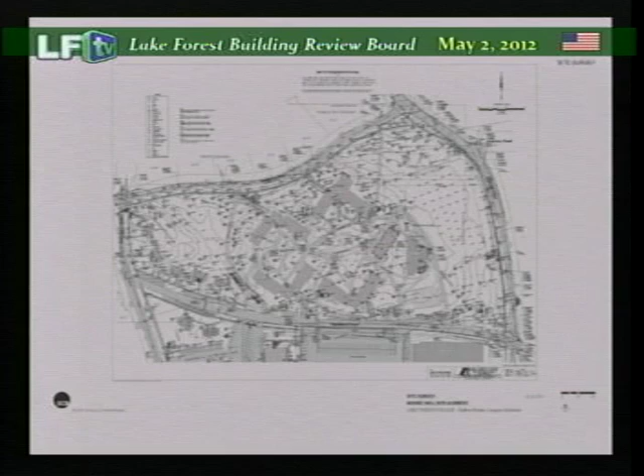The slides I have to present, I'll go through quickly for time, but I wanted to show them all to you. This is still the existing site plan showing the existing Moore Hall. You can see once again Sheridan, and the Rosemary Sports Center for the college on the south side. The majority of the college is moving to the north through Mid and North Campus. This diagram shows two footprints. The dashed line is the footprint we showed prior, which involved an angled building.

If we look at some of the significant changes made since the last presentation, siting and the building footprint is truly one of the major changes. You'll see here that the prior plan angled and followed directly to the north. Yet in the revisions, we've looked at the geometry of the existing quads. We know that the existing Moore Hall came first, prior to the quads, and established the geometry that was represented by the quadrangle development.

And by adhering to that geometry for the entire building, it does a number of wonderful things for the site. One is, you can see it's broken into really two buildings, two legs of a building that are joined in the middle. The lower leg is approximately exactly where Moore Hall is, and you'll see in the massing it's approximately the height of existing Moore.

The leg to the north staggers and follows the same geometry, but in essence those two buildings are quite similar in scale and size. Yet, as I'll show you in massing, we actually dropped the northern leg down to work with the existing topography.

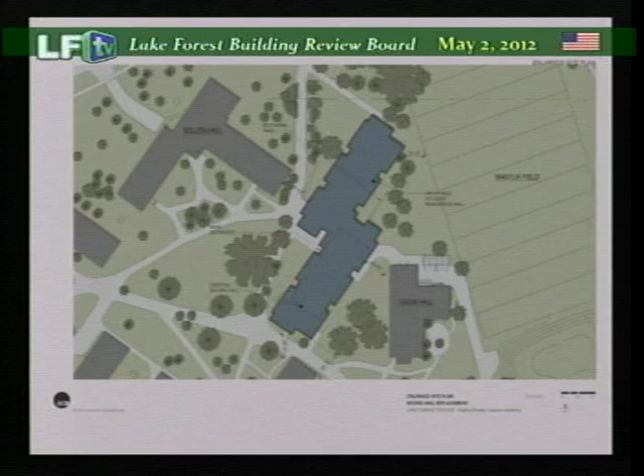If we look closer at the plan, we'll notice that all the setbacks work quite well. We have adequate distance and separation around the perimeter of the building, and although the college has agreed to relocate the water main to the north, we're actually a little further south than what we showed you before. So the setbacks are all well preserved, as is the recreation field to the east.

That's one aspect of the siting. It's allowing the building to conform to the geometry and orientation of the existing quads to make this all work as one unit. We also looked at it very quickly in 3-dimension, and we have further renderings later on.

But this was our initial study. You can see the new building is here, Nowlin is here, Hickson, and then the other quad buildings. It all starts to work as a comprehensive unit. You'll also start to see that this is where we made a step in the building.

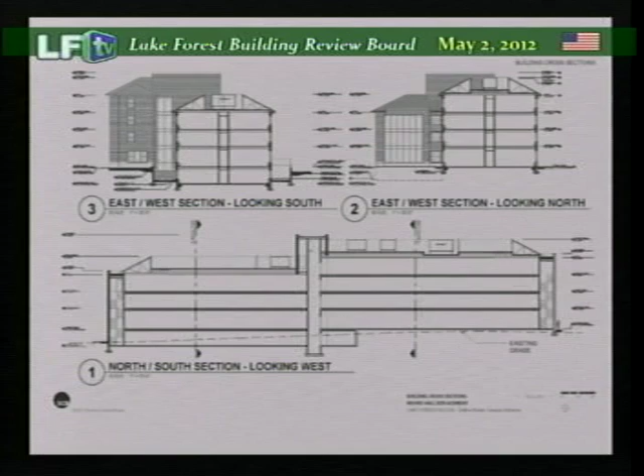We're recalling what exists on the site in the quad buildings. Nowlin Hall right now does just that. There's 4 stories of windows expressed along Rosemary Road, or Rosemary, because it's at a lower elevation as you move toward the street, whereas on the interior of the quad, it's 3 stories. So we think this aligns with how the existing buildings are currently working on the site.

If we look at the overall cross-sections, you can see a diagram. This would be in the east-west and in the north-south. Here you can see the new residence hall. This represents approximately the height of Moore, I think it's different by 8 inches.

Yet when we look at the section through Nowlin and the building beyond as it steps down, it's actually about 8 inches different than Nowlin Hall as well. So in very simple terms, the leg to the south is approximate to Moore Hall, and the leg to the north is approximate to Nowlin Hall. So the building actually moves with the topography itself.

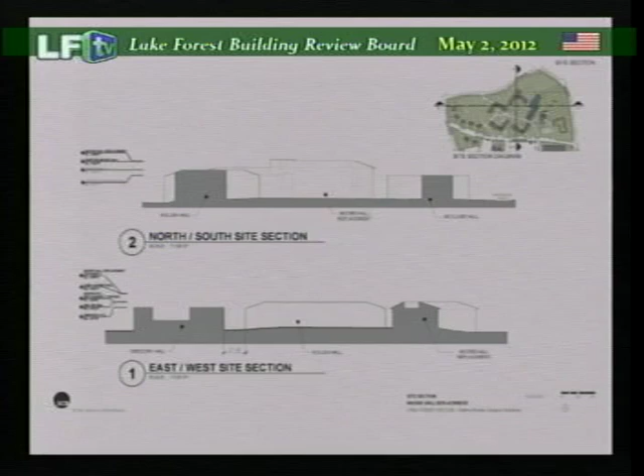So how do we achieve that? Very briefly, in the floor plans, you can see this is the lower leg that's actually on the north end, and we have a cluster of rooms on that lower floor. When we go to the ground floor, the entrance is still in line with Nowlin Hall's entry further to the west. So once again, these buildings are communicating with each other within the interior of the quad.

We've gone ahead and placed some of the program amenities, such as a multi-purpose room and some seminar rooms, but then the rest is units themselves. On the typical floor, a comment was made in terms of the glazing on the social lounge that's on every floor.

We've now moved it to the interior facing side of the building, so you can see it's located here. Along the exterior, along Sheridan, it's all residential units. You can also see that the building itself is trying to be balanced, really trying to be two buildings clustered together that stagger off of each other. For the top floor, we get additional beds by having an upper floor that's in line with the existing Moore Hall.

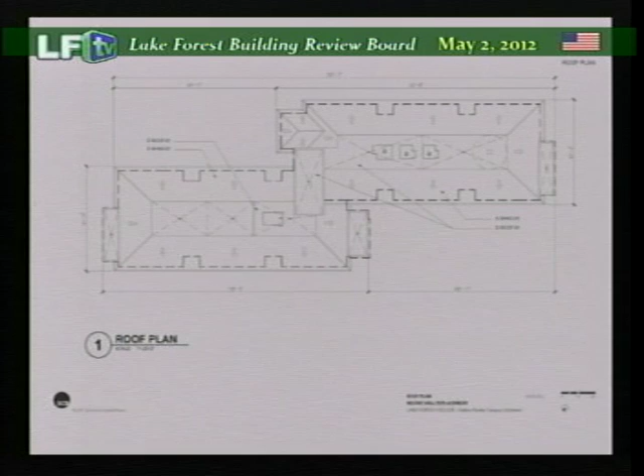The roof plan. Once again, there was a comment, and this was also a concern for the zoning review board, about the mechanical units. We're doing a detail similar to Nowlin and other buildings on south campus, where we have a pitched roof that produces a well, and within that well we can put our air handling units, screening them acoustically and visually from the exterior.

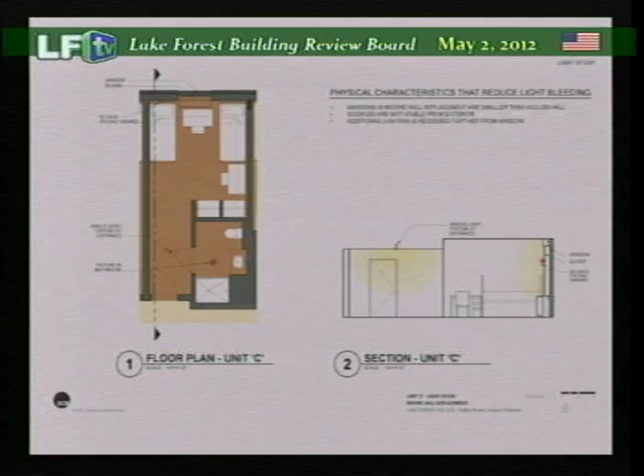Another comment raised is concerning any light bleed coming from the building, and this detail still applies: we have recessed lights deep within the unit, yet if there's a light for general illumination of the room, that fixture would be mounted on the outside wall facing in, so you don't have the distraction of light bleed or a direct view of the light source from the exterior.

Now I'd like to move on—we've mentioned siting was one significant change. The second significant change was in the massing, allowing the building to step with the topography. Now we'd like to talk about the exterior.

I will quickly... You may continue. Okay, thank you.

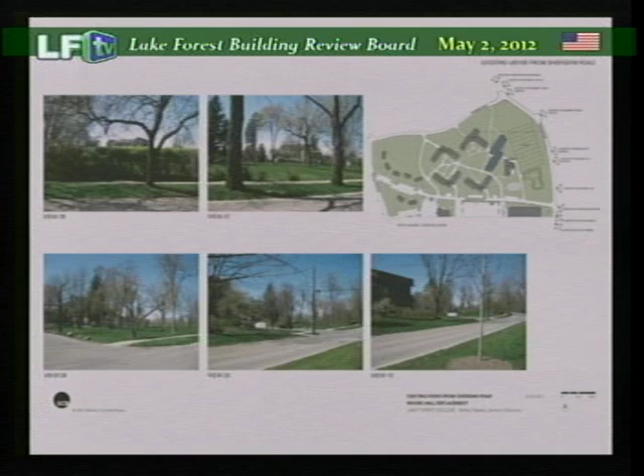At the pivot point—you'll be able to see all this in the model and renderings—there is a pivot point where the building shifts, also represented by the elevator overrun. The ends of the building combine both fenestration for the stair exit and a window for the end of the corridor, incorporating two kinds of brick.

Maybe I can just show you the materials now. This represents the... this one. Yep.

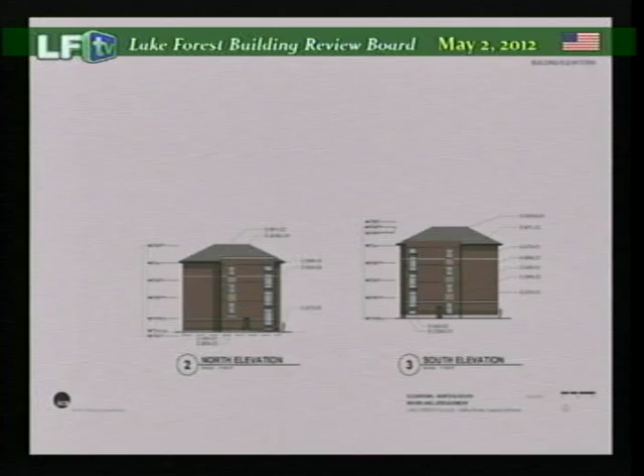You can see to the right, that's the asphaltic shingles that are actually standard on the campus today. We're looking at a warm metal for the windows themselves, and the use of warmer metal. We think it just produces a richer building.

The glass is a clear glass, but it's Low-E coated, so that from an energy code standpoint it performs well. But we don't like the idea of tinted glass. In our opinion, it's not residential, and we want this building to really look residential.

You can see we have stone trim in the building, represented here with the lighter color. The bricks we're showing here, we've gone through a number of iterations, and this is the exterior coloration of the building—it's a significant element. We reviewed this with the college as well.

You'll see that the bricks actually do not contrast nearly as much as the ones we showed you before. They're actually in the same color family, with a slightly different hue, yet the lighter color complements the existing quad buildings.

The quad buildings' color is a little bit more orange, while this one has a bit more rose color. It's actually the darker of the two bricks we used on Nollen for their addition, to match the existing brick—so it's kind of a nice twist on that.

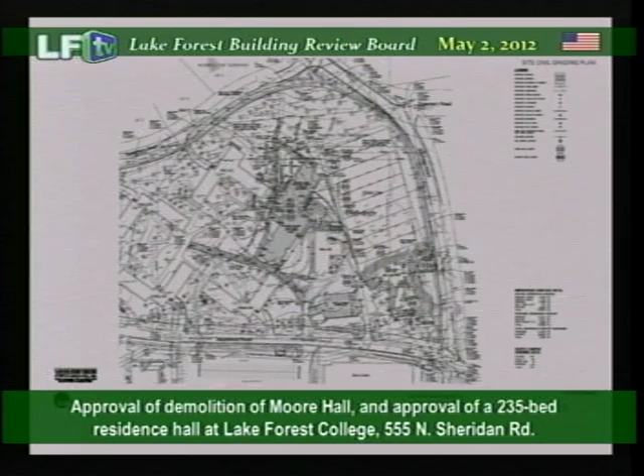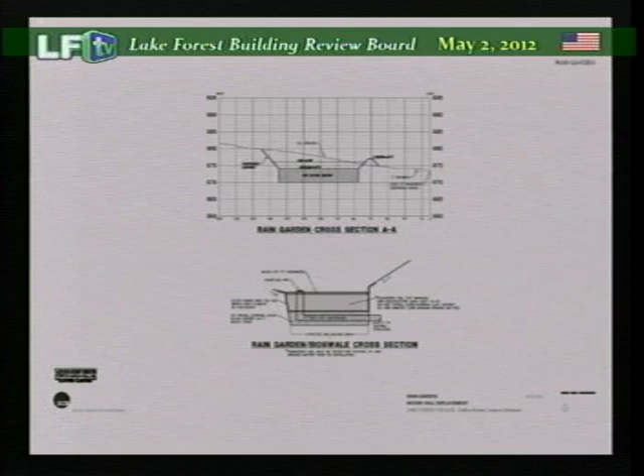The survey we've talked about before, and we've talked about some of the features such as the rain garden. I won't get into that in too much detail, other than the overall vision for the rain garden is very similar to the landscape that exists or has been developed by the sports center, with varied plants designed to work within a wetter environment at times. And that's a cross-section through that rain garden.

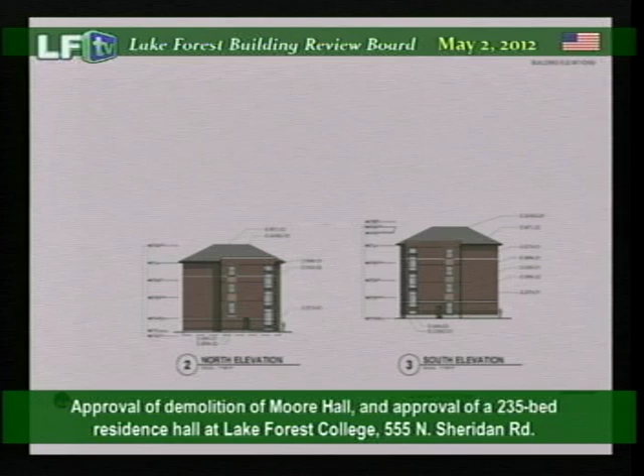And then the coping for that flat roofed stair element, is that metal or stone? That would be - we would like that to be metal to match the stone, the same color as the stone.

And then on the - again, the larger rendering would probably be a better way of looking at it, or the larger elevation. Underneath the windows, it looks like that horizontal band goes from maybe 8-inch to 4-inch, or 8-inch to something else. That's your sill for your window. So it is a smaller dimension?

Correct. Would you consider running that straight through, or is that showing the wash coming from the sill, so it's slightly tilted in elevation? Yes, well, the sill itself would be formed, so it'd have the wash on top.

Does it start at the same height as the band and then reduce as it pitches out? Is that what I'm seeing? Right now it's aligning with the bottom of the band, so yes, that's keeping it consistent, but right now we do have the bottom portion of the window interrupting that band.

For the brick construction itself, are you proposing a traditional 4-inch thick brick, or a thin brick paneled system? No, it's traditional brick construction with a cavity wall. And while we're talking about the brick, what is the brick bond pattern? You're just showing samples. It's a running bond.

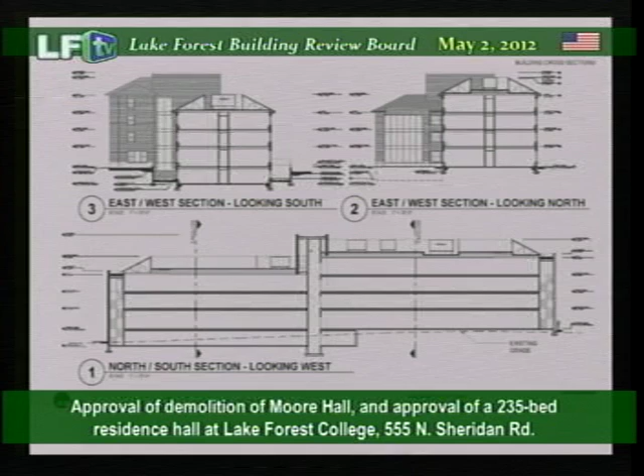What's the elevation difference? It looked to me maybe like 6 or 7 feet, is that correct? I think it's a little less than that. You're talking about the difference from this point to this point, the other side? Yeah. Jody, do you happen to know that number? And have you thought about maybe swinging that wall out to allow more light into that lower level? Oh, that's it. I'll go back, be patient with us for one second.

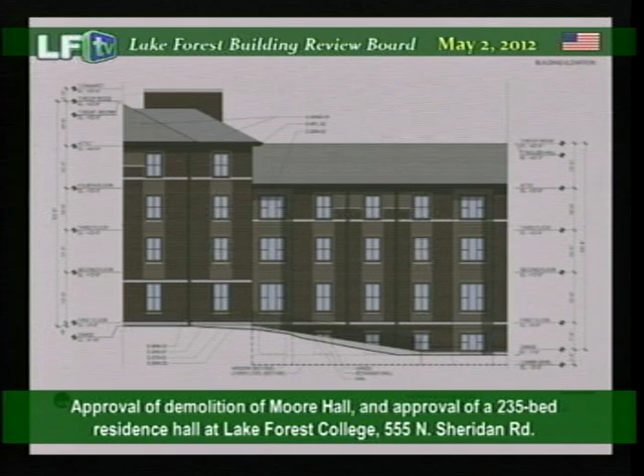It's coming up shortly. I count like 6 or 7 contour lines on the grading plan, I thought. Here, you can see it's located, that's the difference right in there. That wall is not a flat retaining wall, it's actually working with the slope of the topography as well. That's an important aspect, because that sloped retaining area is still trying to maximize the natural light that comes into that area. Okay, it just looked like it was tight up against it, as opposed to maybe swinging it out a little further.

You mean in plan? Yes. It looks like there's definitely units there with windows kind of behind that, and I see what Peggy's saying, that the views of those residents on the first floor, on both sides of the building, east and west, where that retaining wall is, the first couple units are going to have a brick wall right up against their window. I think that wall is probably at least 15, if not 20 feet away from the building itself, so there's ample room. It actually is going to, for all practical purposes, be a little recessed courtyard or court area. We feel very comfortable with the light that would come into the room because it's set back away from the building. This move of shifting the building or working with the topography is a bit of a challenge. I think architecturally it does some very good things, but it's a challenge to make sure all those rooms work and get plenty of natural light and ventilation.

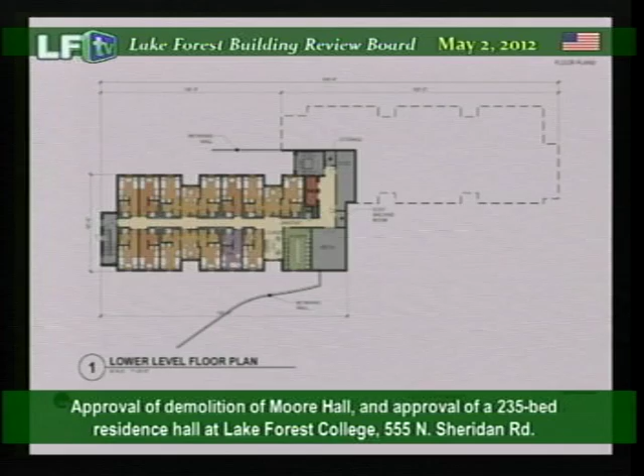Related question, the northeast corner of the site, maybe you could show the site plan. I'm not familiar with what exactly goes on in the sports field in front there, but you only have about 22 feet between the northeast corner and the playing field. I don't know if you have active football games out there, but that seems pretty close to have a corner of a brick building 22 feet out. Maybe there's nothing formally done there and you could move the field a little east, I'm not sure. As you can see, Hickson Hall has the same relationship, and in fact the service drive comes all the way up to the field line itself. So we felt comfortable with that corner location. We felt the overall massing and siting were significantly beneficial, and the approximation with Hickson was something that would be workable.

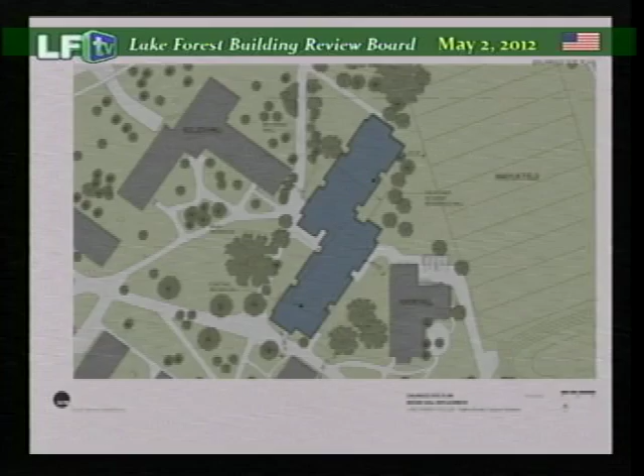Just to add something to that, Charlie, I've been out there several times and I sit on that little wall at Hickson to watch my kids play football in that field, and it never really strikes me as being anything that's too close. My last question is, why did you eliminate the gables in those recessed areas?

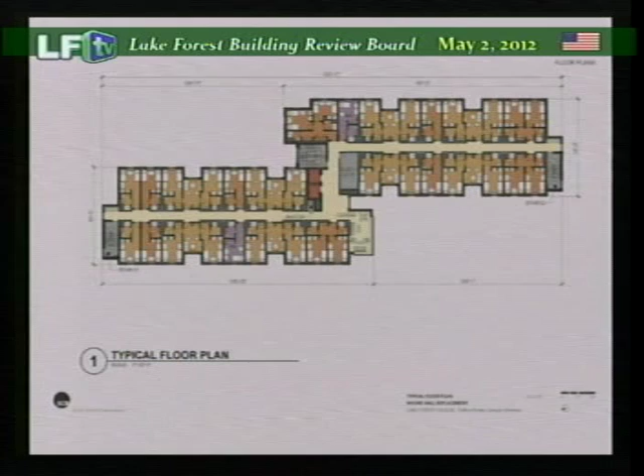Well, actually, a couple of reasons. Let me go back to the elevation. The building's facade is significantly shorter than the facade we showed you before, and we have two recesses in this plan. We felt that the eave being continuous, interrupted in its length by the shift down, and also interrupted by these elements bracketing the building, gave enough articulation to the roof profile without adding the confusion of the gables.

Also, when we look at Nollen across the way, not to say everything is perfectly matched, but Nollen does have a fairly strong eave that this building would relate to. In fact, the legs are approximately the length of Nollen too, so everything starts to work together as a cohesive whole. Yet we're adding some variation on the coloration to bring a richer hue to the overall aesthetic of that South Campus. In essence, we felt that the movement in the building, the shortness of the leg, and the brackets on flat roofs, not only in the middle but on the ends, give us enough variation on that eave that it didn't need the gables.

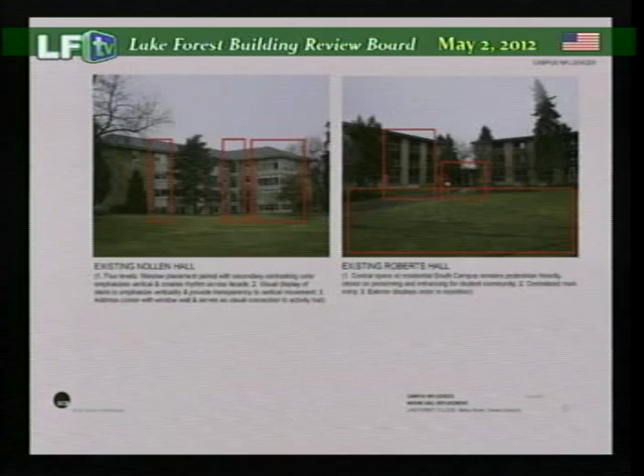So what is the highest elevation from grade at any point of the building? 55'6", I think the elevator overrun is taller. The rest is 42'8". Right there, and that is what? 55'6" inches. Okay, thank you.

Does the building have an elevator? It does. We typically in these buildings like to do a slightly larger stair and encourage students to take the stair, it's part of building community within the building itself. I understand that. And then we have one elevator for accessibility. I don't see it, is it in the mechanical room or something? Next to the stair. Oh okay, never mind, it's been pointed out to me, thank you.

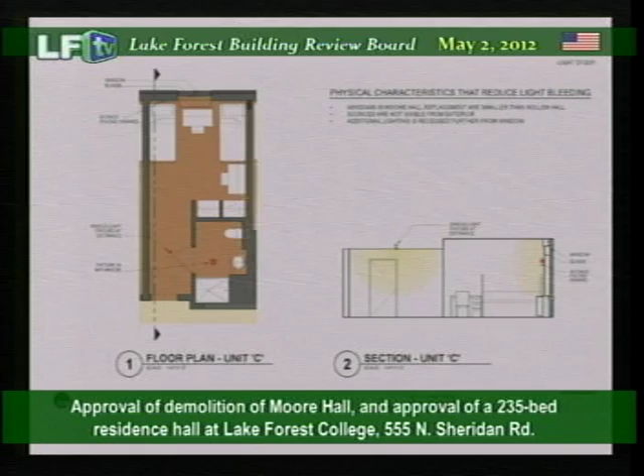And what is that distance between the new building and Nollen as the sidewalk comes in? I know at our prior meeting we had talked about that closeness and that tunnel effect, especially with the height of the building and the grade changes there. I think the fact that you reoriented it will help. 35'10". Just as a side note, the distance between the quad buildings is 42 feet. So to a certain degree that's why it feels correct in the site plan, because it's related to the other setbacks. Okay, I just couldn't read it on this plan. So it's 35'10" inches? I see, okay.

Any further questions? Okay.

At this time we would welcome any comments from the public regarding this petition. Okay, hearing none. Does the petitioner have any final comments? No. Before we take it to discussion, okay thank you. Then do we have any final questions from the board before we go to discussion? Okay, then we shall take it to discussion amongst the board.

Yeah, I'd like you to start. Okay, I'll start with, I think the work that they've done is really good. The siting of the building is a big improvement from what we saw previously, and this plan really starts to relate to the other buildings and the quad. In doing so, they also shortened the building by staggering it, so there's big improvements from what we previously saw, just on the site and the footprint. And as Kathy mentioned in the staff report, I think this is going to be less visible from Sheridan Road, where you're seeing it from a different angle, whereas before you were seeing the full mass of the building.

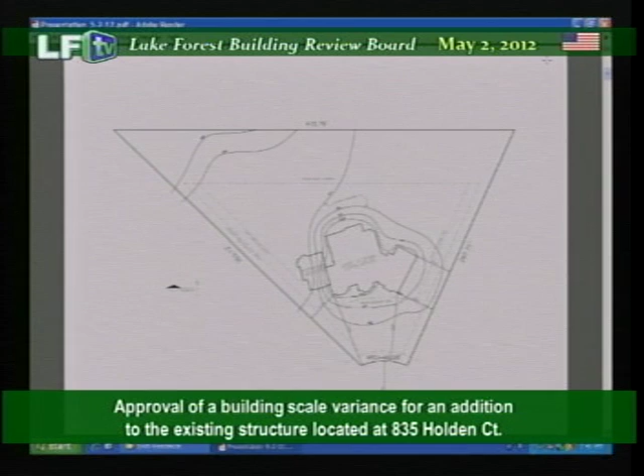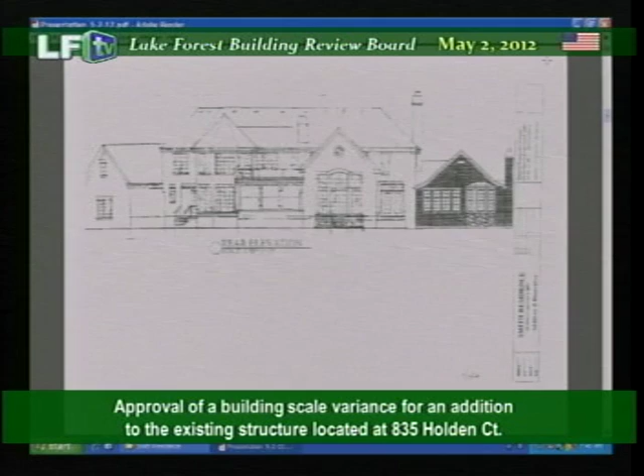I brought these slides to show the original architecture that was presented back in September. This was the front elevation of the home, the side elevation of the proposed addition, and the rear elevation of the addition. We took into account the comments regarding mass and blending the structure in with the house, and have developed a new form of architecture for the addition that we feel better suits the home and the neighborhood.

We've taken into account some of the existing design elements of the home, which is probably better illustrated on the black and white version, starting with defining the eave line of the home. We've also incorporated the windows, trying to bring in the architectural detail of the transoms, not only above the front door, but at the second floor lines as well.

We reduced the massive gable that was originally on the front elevation down to a hip roof with a smaller accent gable, which is above their tub on the inside of the home. We've also pointed out that we're using some of the other existing details of the home, such as the eyebrow gables, and have aligned the roof pitch of the hip with the main roof pitch of the house.

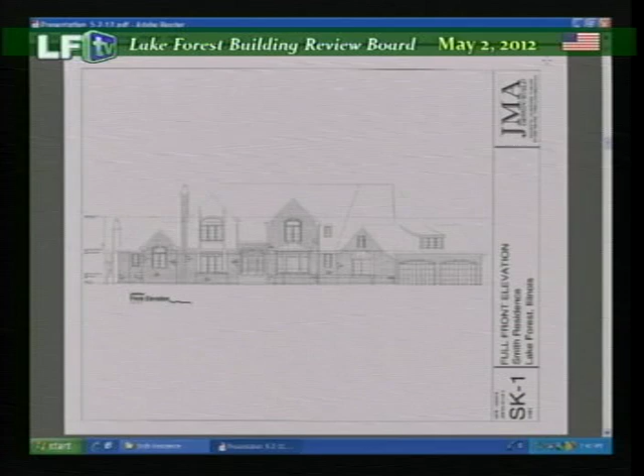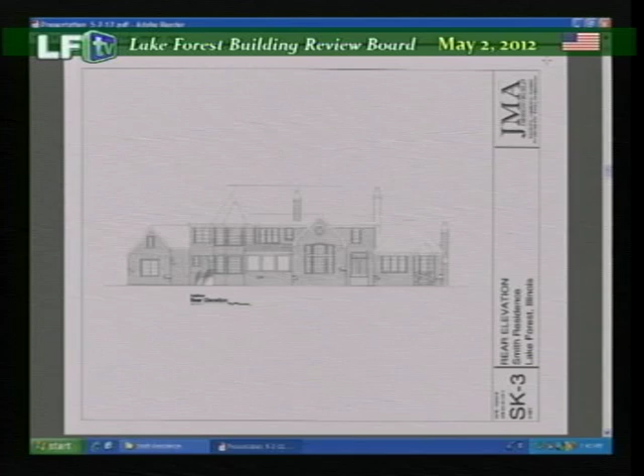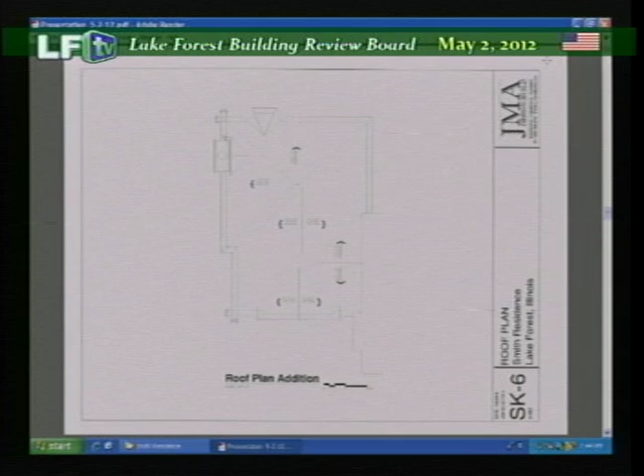I wanted to show the roof. There's a plan view of the roof in your packet showing how all the roof lines match up and work with the existing structure. The existing home is up in this section, so there's just this valley. The rest is all eave line and the front gable.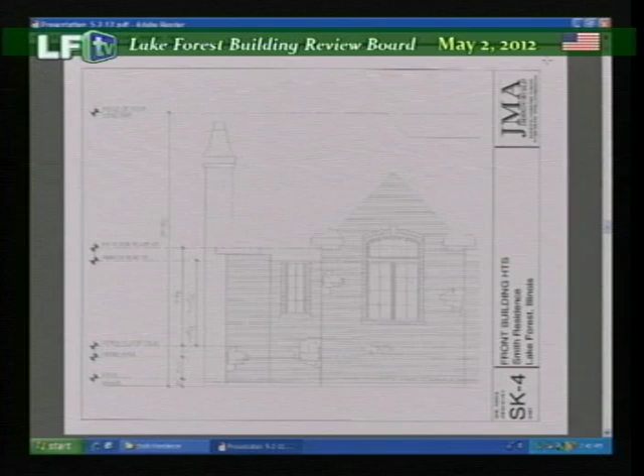We also recognize that staff had a comment regarding what this elevation might look like without the transom, suggesting considering not putting the transom in. So we did a study to show what the elevation might look like without that transom window. Again, with and without, we just feel it adds a little more aesthetic from the curb.

The landscaping - we also acknowledge the comments given back on the landscaping. We went back to the original landscape architect and installation company that did the rest of the yard, Don Fiore, and working with them have come up with a plant removal plan. As you can see, there's basically 5 trees that are going to be removed. We feel this has minimal impact on the existing mature landscaping.

The blue represents trees, or bushes, that will be transplanted during this process. We have a staging area selected on site where we would take these plants, store them in the back of the yard, and then bring them back once the addition has been completed. I'd also note that the 5th tree is a storm damage tree that needs to be removed anyway, so although it's shown here, it has not been removed yet.

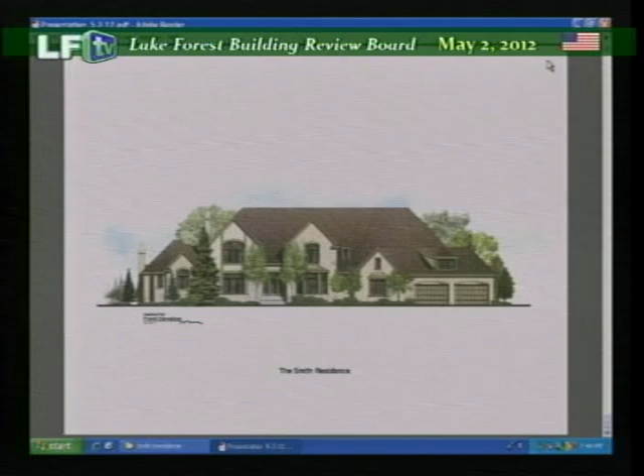Thank you, Chairman. This petition has actually been before the board on several occasions. Most recently, last year in 2011, the petitioner brought forward a similar project that was reviewed several years ago. Based on the drawings presented to the board at that time, the board expressed some hesitation about granting a building scale variance of the magnitude presented.

But now the petitioner has taken those comments they heard at the last meeting. They're working with a new design team, and they've developed a revised plan that really tries to reduce the impact of mass from the street in form and design detailing.

They've also presented a more cohesive packet to the board, including landscape drawings, consistent elevations and floor plans—some of the items that were missing from the discussion the last time the board reviewed this project.

This project, from staff's perspective, is a unique project. It really does appear to meet the intent of the building scale ordinance, and doesn't create a project that is overscaled for the street or out of place or out of character with the other homes in the area. The previous project presented a more massive face to the front with the gable roof. The current petition chose to do a hip roof to really reduce the mass as you see it from the street and from neighboring properties.

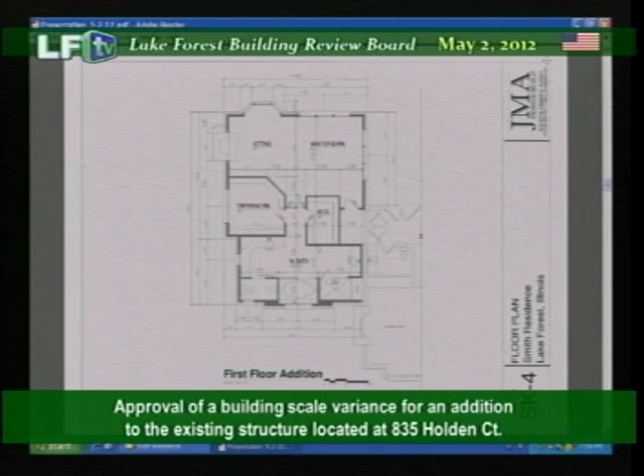So those doors there, are those existing doors? Yeah, those two are existing, but they go to a closet. So they're existing as a closet. Is that a foot and a half or so closet depth? I see. So is that your coat closet for guests? So that's a coat closet. We have another coat closet. So we have two. We have one in the foyer itself. But so this is a secondary closet.

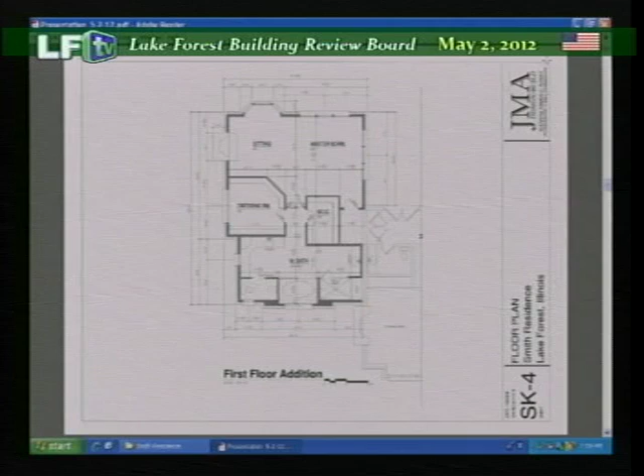Okay, so when you designed this, your intent was to take that closet off and have a continuation of the hall into that cased downstairs master bedroom, ready to go? Absolutely. Okay, that answers my question.

And just to clarify, on the original landscape plan for the original house, even though it wasn't approved, there was actually an addition sketched in this very area. So it was a very real, thoughtful process to say: we know we want to build this, we're going to make the house smaller, and this is where it's going to go. Right, okay.

I have a question for the architect. You had shown a suggested thing, I think staff recommended on the window. You were showing the eyebrow arch or transom carried from the second floor in the front entrance. Is that correct? Correct, yes. And then you showed another sketch with that eliminated, which I think the thought there is to reduce some of the massing a little bit more.

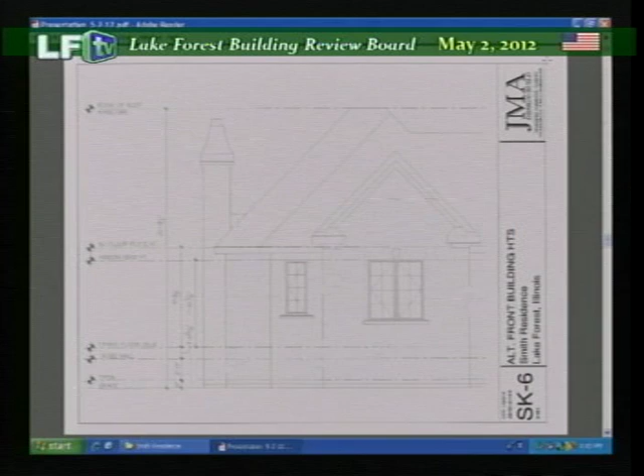I think I tend to like that without it, but whatever. Okay, you've answered my question. Thank you.

I have a question for the petitioner. You said you had gone through all the staff recommendations from before. I think there was talk, my recollection was possibly closing in the addition closer to the house, to help reduce the mass also.

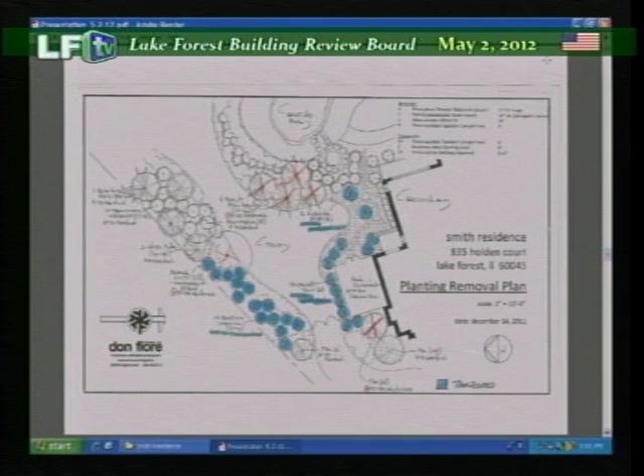Did you consider that? We did consider that, and our concerns were—maybe it shows better here on this plan. I believe you're talking about closing this area, bringing the structure in and pulling it back. We did take a look at that.

The existing home here is a 1.5-story element with windows on this side of the home, and the owner and we felt that this would detract from this room and this space of the existing home by removing those windows. This is actually facing northerly, and this room lights up very nice.

We were also concerned about, if we pulled this in, how the roof lines would match up to this house and then play off the 1.5-story structure on the back of the home. So we decided to leave this, given that this hallway is existing inside, as we previously went through on the last question, and there's a formal powder room, so without getting into remodeling that section of the home, we decided to leave it.

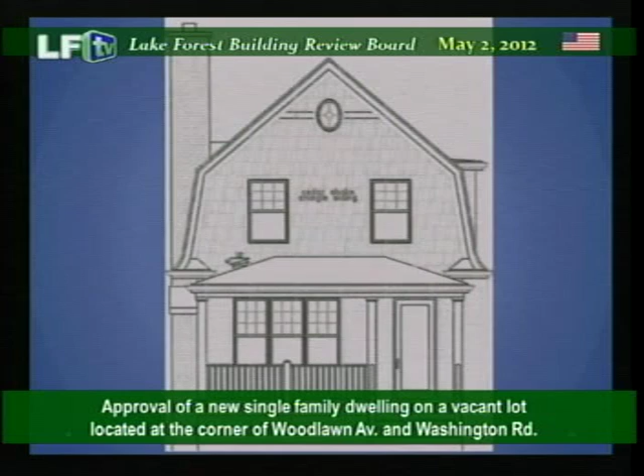The home that we have presented here is a Dutch colonial style, 3 bedrooms, 3.5 baths with a detached garage. Based on our designs, we have fit within the code requirements for bulk ordinance, square footage, the building box, if you will. We're well within that parameter.

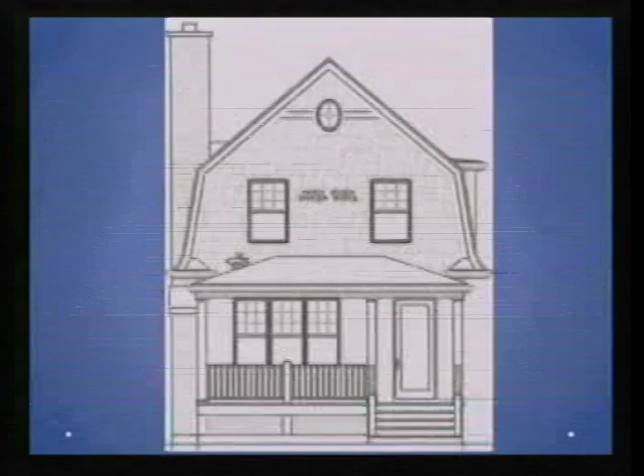What you're looking at here is the south elevation of the property. This is the side of the house that faces Woodlawn. Being on a corner lot, we are sensitive to both elevations, the front of the house and the Woodlawn side. The garage also faces Woodlawn, and it has a south elevation as well.

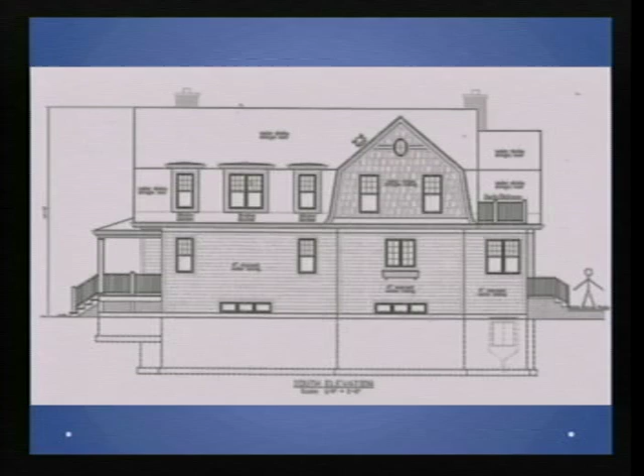This is the back elevation of the house, which faces the east. The courtyard area between the house and the garage, we're intending to install a fence to make it somewhat of a private courtyard area. That was illustrated on the drawings that we had submitted.

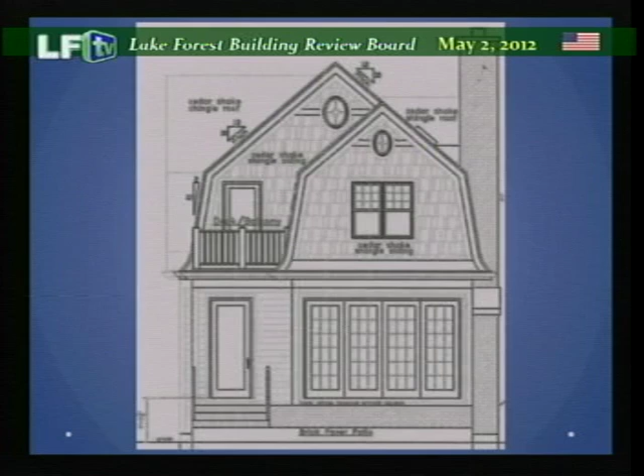The elevation next is the north elevation. This elevation faces an open parcel of land. There's a lot that is empty next to us that's wooded. It's the same size as our lot, 45 feet wide by 170 deep. So we don't have a house directly next to our home to the north, it's an open space, and then we've got the open space towards the Woodlawn side as well.

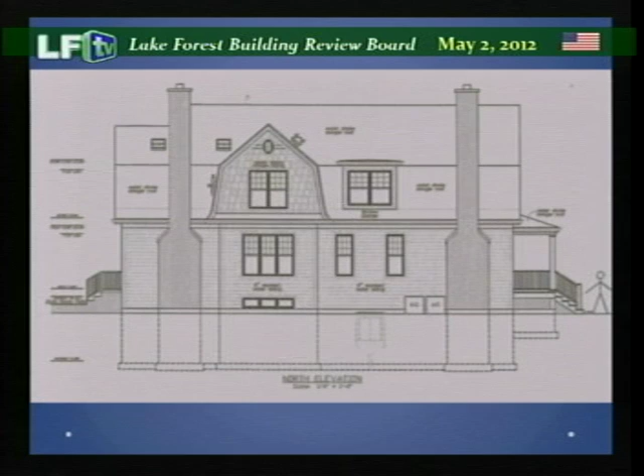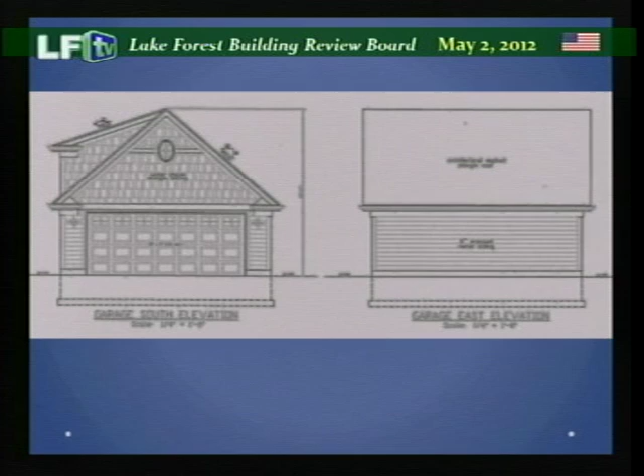And you're looking at the garage elevation. One of the comments from the staff's review was about the dormer on the second floor. We've considered reducing that in size and bringing it down the roof line, or perhaps eliminating it altogether, and that's open to discussion as well.

This elevation is the north elevation. We've placed windows on the north elevation to allow light in, as well as the west elevation that would face this inner courtyard area that we're trying to create. We purposely left windows off the east elevation because that faces the neighbor's house, and there's a driveway that's very, very close to the property lines. So we didn't feel there was a need to have windows on that elevation looking into the driveway area of the house next to us.

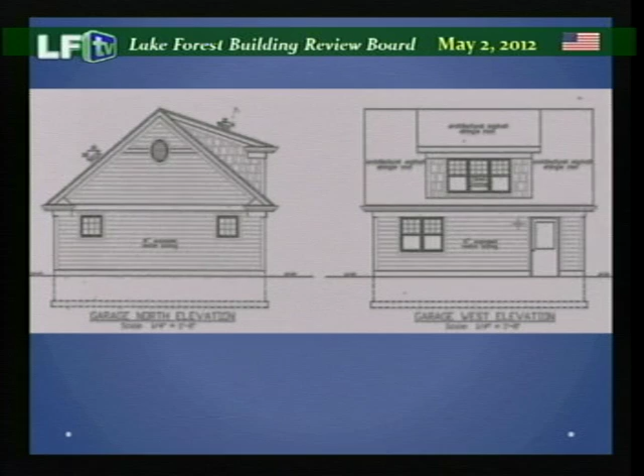The landscape drawing here is our first draft of landscaping. There were a couple of comments about the landscaping and the trees on the property. On the elevation on Woodlawn, there's an area of the home that has a larger open space between windows, and our intention is to put some larger, mature landscape trees along that area to address that issue, as well as the front sidewalk that exits out onto Washington.

That pattern, that shape, will be addressed as the landscape is developed. I met with the city arborist, and he would like to see that curve around a couple of large trees that we have that will be remaining. So we're definitely open to changing that design to work with the mature landscaping and trees on the property.

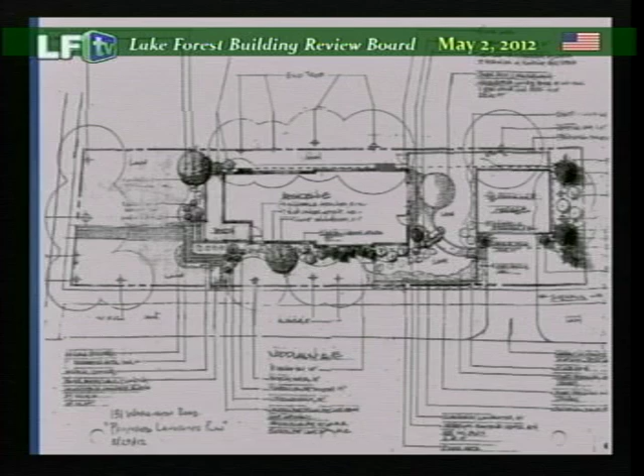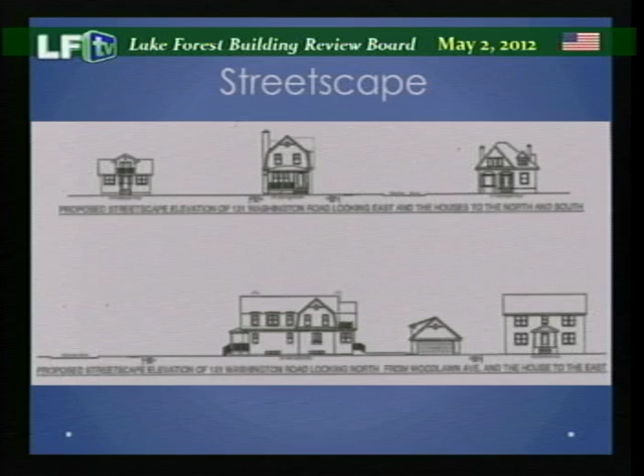If you have any questions or comments?

Thank you. We'll have staff present their report at this time.

Thank you, Chairman. As was noted by the petitioner, this is a corner lot. It fronts on Woodlawn as well as Washington. There are actually two vacant lots on this corner, and both are developable. The proposed new single-family dwelling is on the one closest to the street, so it's on the immediate corner.

As with all petitions, the board is looking at this with respect to the standards. In a neighborhood such as this, where the homes are very close together and the lots are narrow, new construction is visible from the street. New construction can either be very noticeable or it can appear seamless, as if the house was always there. I think the standards in the ordinance give the board the framework to review projects and make sure they're compatible along the street from a streetscape standpoint.

Staff is recommending approval of this petition. There are some comments in the staff report to give the board framework, to make sure we understand the details and that the nuances are done in a manner of more traditional detailing. Things like making sure there's a visual support column where things cantilever, that the proportion of the eaves to the roof shape are correct, and subtle details of the dormer window so it's scaled appropriately for the neighborhood and the garage structure. Those refinements are noted in the staff report, and we're asking for board input and discussion on those items, but we are recommending approval of the project.